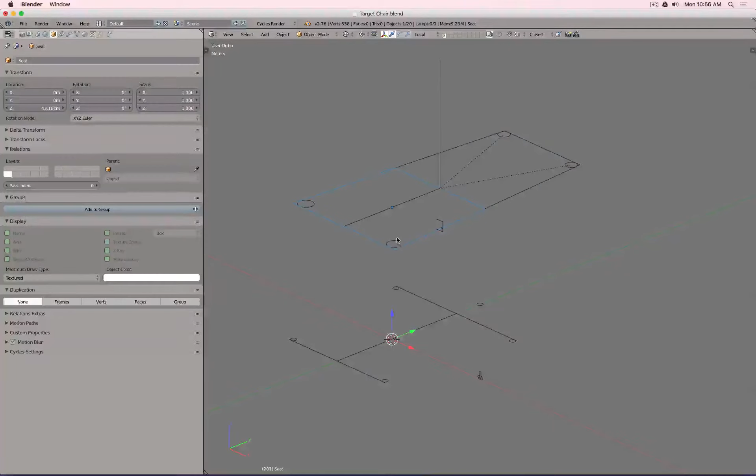Inside the Blender file, I put in already most of the necessary elements. So you can see there is the backrest, the seat, including some preliminary roundings for the corners. Here's our spline, because we will build everything flat and then we will bend it. I have here a spacer for the front and back position of the casters, so I know exactly where the pipes will have to be. There is a small dimension line to define how far these two lines have to be apart from each other, including also a small sketch of, for example, the caster.

And here, for example, I put in an idea for how the joint could look. We will, in this process, still rebuild this part in a basic way so that during rendering or presentation it is functionally self-explaining. Obviously this is a stock part we might pick out of a catalog, so we don't necessarily design it ourselves in case there's something already on the market. But it's always good, in a professional presentation, to put these details in to a certain degree so that they are really self-explaining.

Okay, so maybe we should start with those legs. I have here the position of my casters. So there are two ways now how we could actually start everything. And I will actually put my casters into position first, because then the pipe later has to end at a certain position where the casters will be.

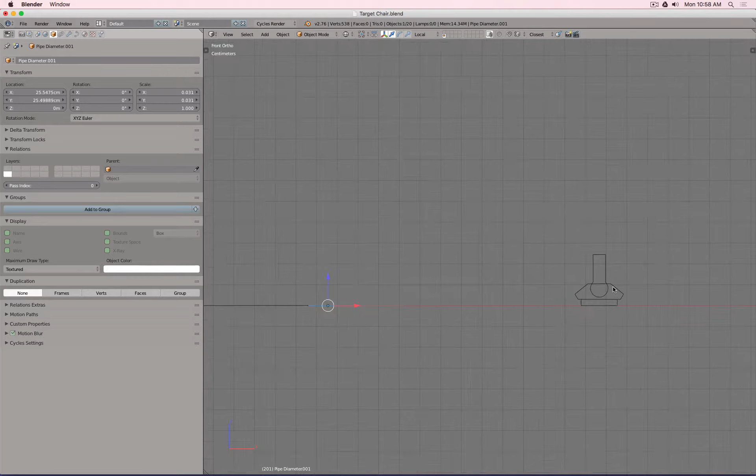So maybe in this case we will continue by making a copy of those elements, because then I can go ahead, subdivide it, delete it, and then I already have the geometry to create a very basic representation of that joint. 64 steps - we can go really high here simply because we will not use the subdivision modifier to make it smoother, so just some higher steps so it renders fine. Because again, we will rebuild this one as accurately as necessary to tell our story, and then we don't have to do anything more because this will be a bought product.

So here we can do the same. These points we subdivide, then this I can remove. Here, for example, this one I can bring in and maybe move up a little bit. Okay, let's say like this, and there, this one will bring back a little bit. And these points we can round with Control B. Oh, there's a scale factor, I think. Yeah, there's a scale factor. So in object mode, let's apply it.

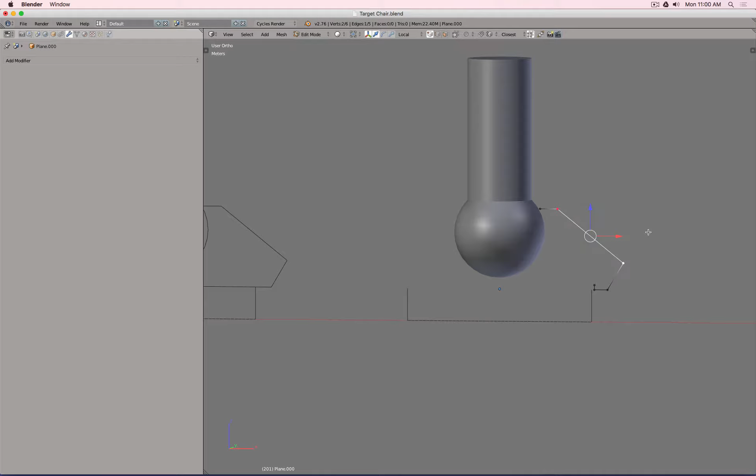Let's do the same here. This one is applied. Okay, so again, Control B. Why doesn't it work? Oh, I'm kind of silly. Shift Control B, not Control B, because Control B rounds an edge and Shift Control B rounds a vertex. Wah, wah, it's early in the morning.

So I can just set something as I want, and then I open my toolbar, go to the bevel command, and let's say maybe 10 steps so it renders nice and smooth. This is actually 1 centimeter. Yep, so I'm in metric, so maybe 0.5 to make it a little bit softer - that's half a centimeter rounding. You also can see the grid. Now this is actually millimeter, not centimeter, sorry, so half a millimeter. I don't know, maybe there we go with 1. It's nice and soft. And then to make this look a little bit smoother, we change the profile a tick.

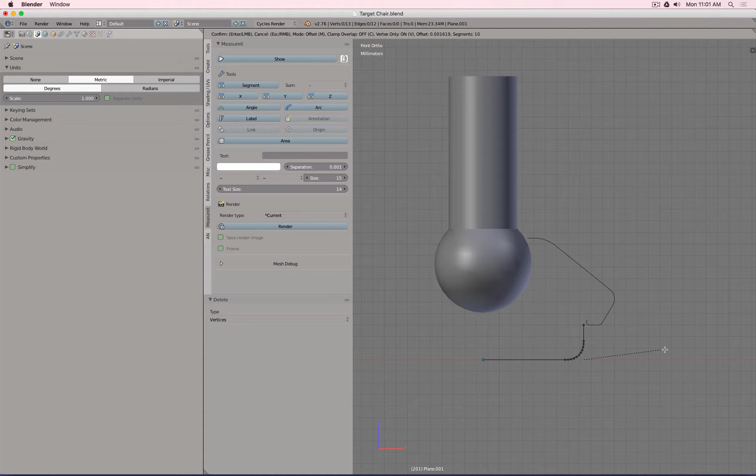Okay, and then these two points, Shift Control B, we just break the edge a little bit. So for this part down here, we can select this edge, add a point via subdivision, and then we can round this one pretty big because that will be the sliding element. We can move this one up, and honestly at that point we can leave it because internal structure we don't see - so in rendering or presentation, what you don't see, simply don't put it in when we're not going to manufacture it, and just render it.

And also here, screw modifier 64 - let's take a look, and that looks pretty good. We can easily see there's a small gap, but the caster is very often this tiny, so as long as the camera doesn't get so close, it's not going to be a problem. If we want to be nice and precise, we can round this corner a little bit, so that's nice and smooth now.

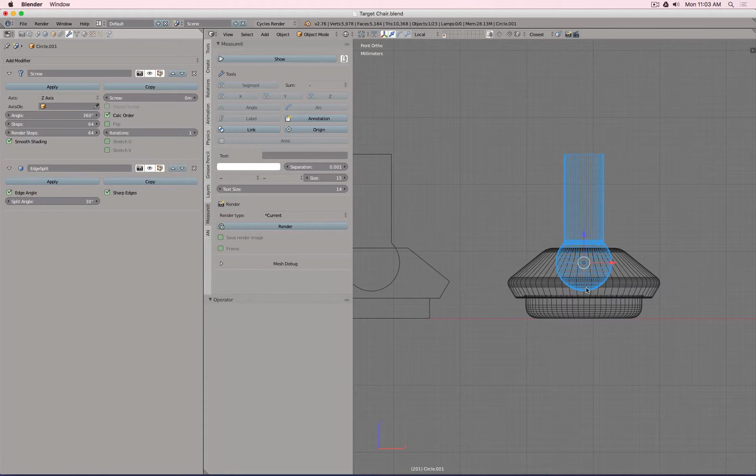Okay, so why did we do this? I will do the following now. So you and you - we actually Control P, parent everything to this part. The main reason is now I can select all this, Alt D, move it to somewhere else, and I do it 4 times. So I have 4 clones, and then I start positioning these objects.

Cursor to that position, and then selection to cursor, cursor to selected, selection to cursor. So you see I'm positioning now all these casters at the correct point.

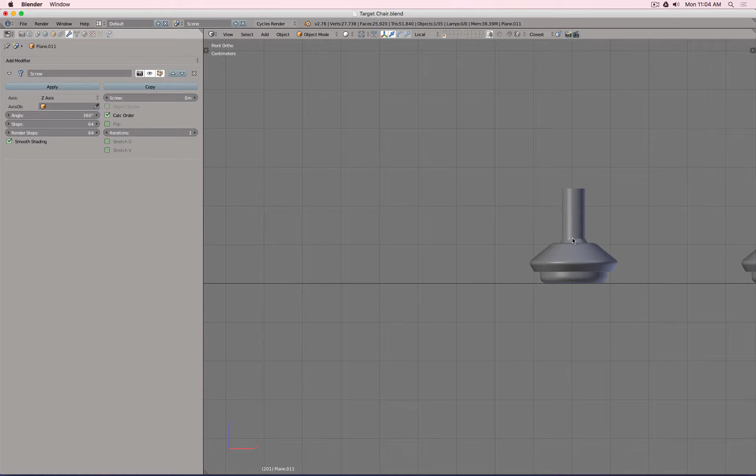And I roughly have now an idea where, for example, the center point of my pipe would be. So let's say this one would go in a little bit, and from here this would go in there a little bit. So maybe where this point is, I will start creating my sketches for my spline.

So let me measure something - I'm curious where this object actually is. This is 8 millimeters. So I will set here everything to 0, and then 8.3 millimeters.

Okay, and just create a plane. This plane for me is just as a reference or a helper to visualize something. Okay, so let me hide this for a moment.

So now I'm ready to create the splines. I could maybe start with the back leg. So cursor to selected, go into top view, and let's add a Bezier spline. I will set everything to vector, this point, cursor, selection to cursor, okay.

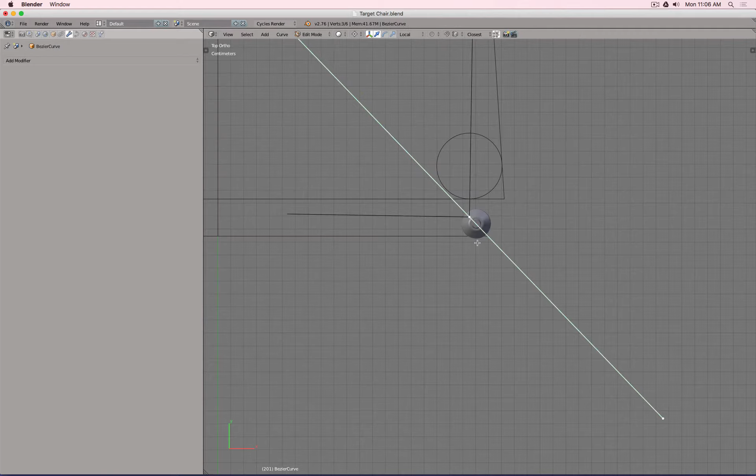Okay, so in object mode I can now rotate this one. And then when I go into edit mode, and I still have local mode turned on, you can see now that I can move this vertex and make my spline longer or shorter.

And for example, it should be roughly there. Then maybe go into object mode and fine tune the rotation. There, and this seems to be pretty close. And we can bring this one back.

Okay, so now you see I created a line from this point to this point. So let's say 3D cursor to the center, because I want to double check if I'm really on it. Oh yeah, I'm pretty close. Perfect. Okay.

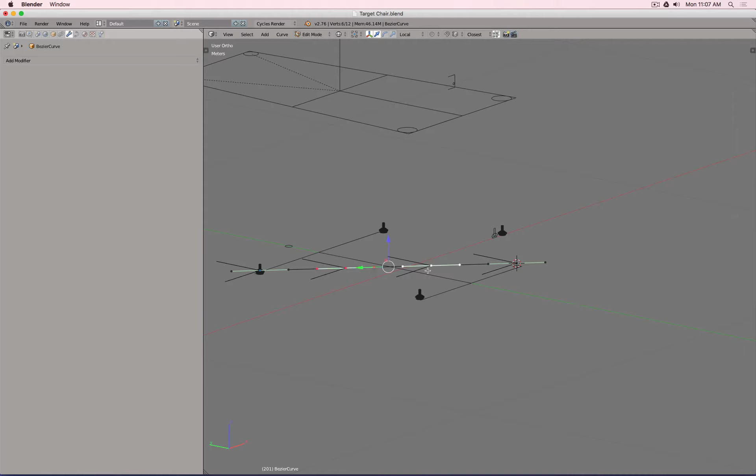So I have to get everything up. I can select the complete spline, W, subdivide, and then either F6 or go to the toolbar, and then we add 2 points. And then these points we can move up, maybe till there, let's say.

And then I have to move these corner points forward. And you see now, because I'm in local mode, I rotated my object 45 degrees - I think this one, yeah, 44. I can now easily make use of local mode and simply slide everything perfectly. I don't have to be concerned about moving it left and right. Okay, good.

So, because Blender can have clones, I can Alt D, make a clone, move it to somewhere else, select this point, Shift S, cursor to selected, and then say selection to cursor, and let's make this one minus. So now it's perfectly mirrored. Okay, you can also see where it intersects. Great, so that's kind of like our basic leg.

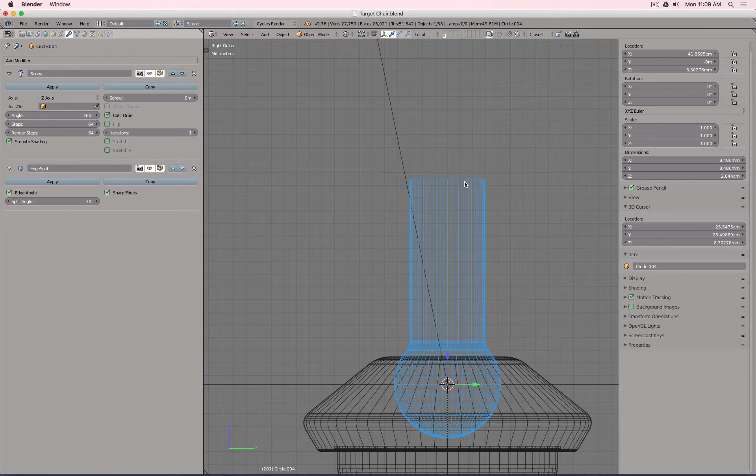And for example, here we can select this one and maybe in this view rotate it. Actually, we can select maybe both here, there, and rotate it at the same time. Maybe zoom in a little bit, there. And then here we have to do each individually.

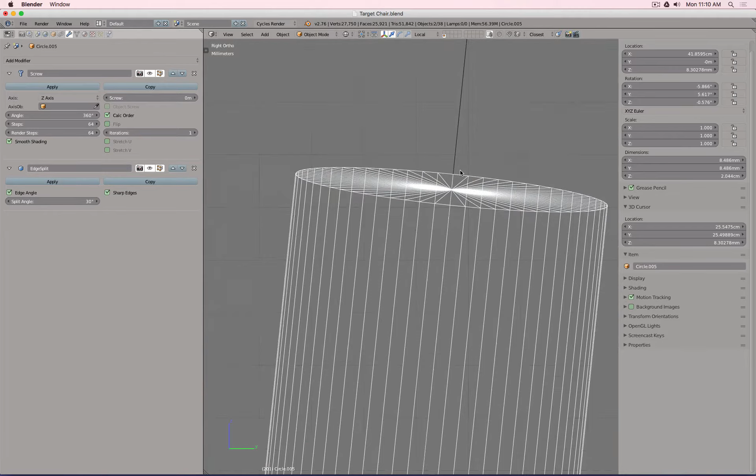And there. I think this was 8. So also here can rotate this one, do the same there, and then go to side view, select both as you can see, and then rotate it. There, perfect. Okay, so as you can see now, I also have created, rotated all those joints or threading parts, so they're kind of like parallel to the pipe.

Don't really have any piping yet, so let's do this in the next step. This object, I will Shift D, make a copy, because I don't have rounded edges here yet. I can't select a point and say Shift B to bevel it, because it doesn't work. So we have to do something different, and we'll use some interesting tricks here.

So this top edge, so these 2 points I select, subdivide it 1 time, but I want it twice, because now I can move this and this, and then scale them apart from each other with S, or YY, it's the same. And then we can also select this and this, this and this, subdivide it, and I want these points to be at the same height, so I will use a very crude trick. As you can see, I subdivided then these new segments 1 more time, so I get these points higher.

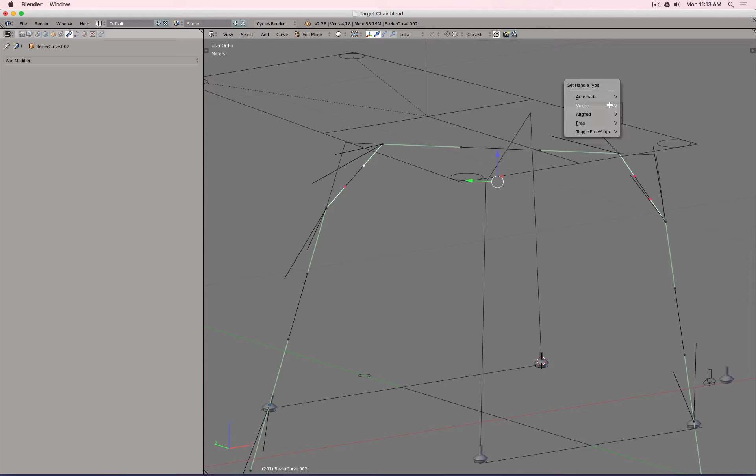So what was this useful for? Well, the thing is, I can delete now these corner points, and then these handles I can set to aligned, and I have, as you can see, rounded edges. So as it looks like, I can subdivide this 1 more time and then get rid of this. Now this is a really crude way to do it, but again, for a quick visualization, if you don't have a fillet tool or so, this is actually pretty useful.

So now I will go to normal and, for example, push this point up. Same here. There, maybe I will push this out a little bit, and there. And let's take a look how the rounding looks. Okay, yeah, maybe this is a little bit too tight, so I soften this a little bit. There. Okay. So again, because in Blender we don't have a fillet tool for curves, but because we work with a spline tool, we have it kind of like built in. We just sculpt it. Okay.

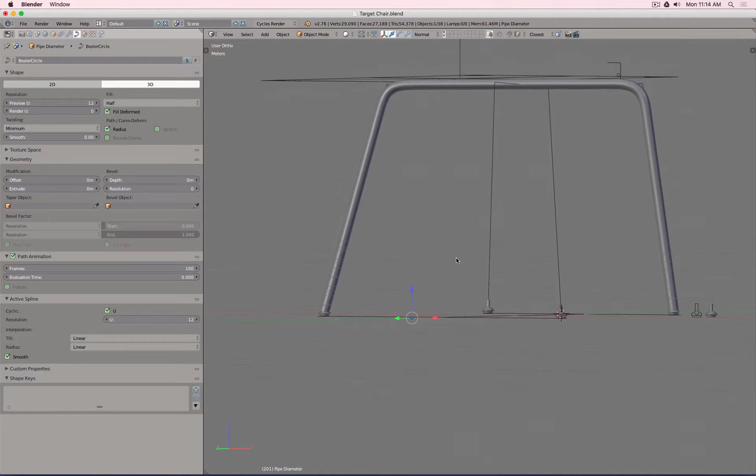So this, maybe we can move to the first layer, because now we can add actually the pipe cross section, which I have back here. And then we can take a look at how this feels. Let's take a look at down there.

Okay. So this pipe, maybe we want to duplicate, so Alt D. This is currently on the negative side of X, so we set this one to positive 25, and then this Z rotation we set negative, and there we have it, perfectly mirrored. Okay.

I quickly want to select these parts here and hide it, and then also hide this. Nope, this spline, because I want to bring my casters over to the first layer. You, and you. Move to layer 1. Okay. There. So now we can zoom in and take a look if there are some issues, and there are.

As you can see, the pipe intersects there. Not really ideal. But this is not going to be an issue because we also have a spline start and end command. So we can actually move this a little bit backwards. So this is maybe a tick too much. 0.0005. Ah, this is better.

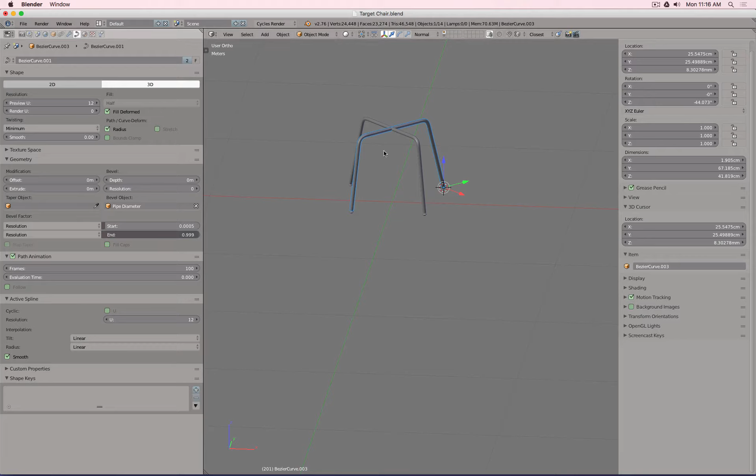So let's double check how this all looks. Okay, this looks like a little bit too big. Maybe rather there, okay. And then here we can do this one more time. You see, because we work with a clone, they update all at the same time. Pretty nice. Yeah, maybe like this. Okay. Good.

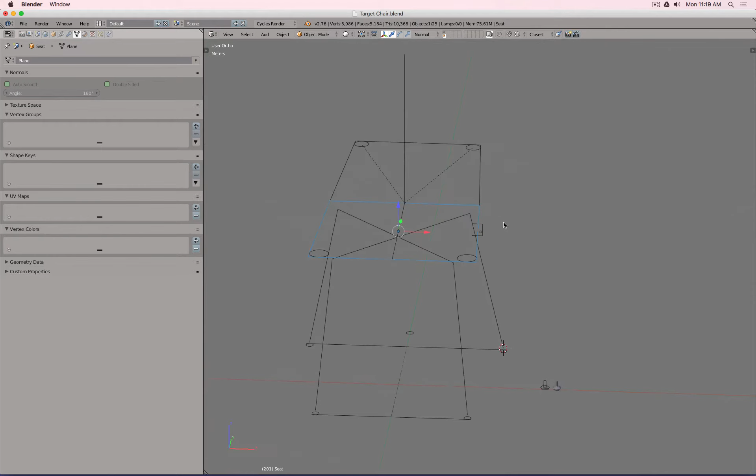So, I would say for the beginning, this part is pretty close, and maybe we can keep it at this for the moment. So at this point now it makes sense to start actually with the harder wood part. So I have these two elements here. So the seat and the backrest. I will make myself two copies. Shift D, I'll move it to the second layer, and then actually I will join everything.

Actually these edges I will remove. These points I will merge by remove doubles. Okay, and then actually for the moment I will say dissolve vertices A and F, so I have a flat shell. So why did I do this? When I go to here, we can see that there is a little bit of side material. So my wood part gets actually pretty close to the left and right side. So let's say this is roughly 5mm material.

So I might have to shrink this wood part a little bit now. With this face selected, I could press the I key to do a face insert, then T to go to my insert face command settings - even offset, yes. I'd like this to be 0.5cm. So you see this is now centimeters - this is 5. Did I say 0.5 centimeter? Yeah, that's 5mm. So now we're in millimeter view.

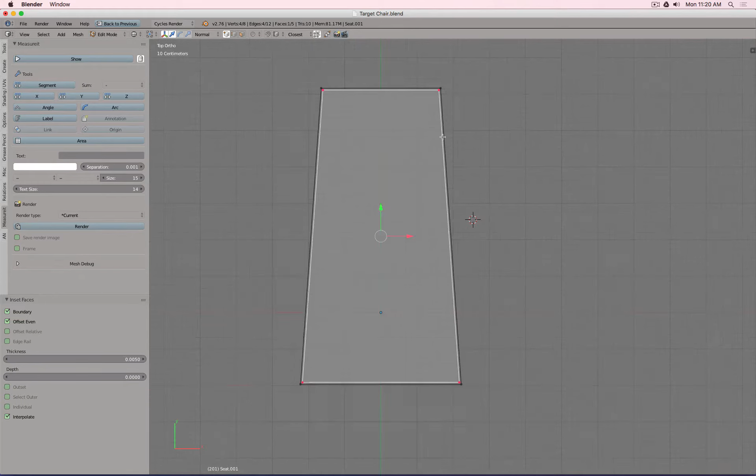So each square is a millimeter. 1, 2, 3, 4, 5 - yeah, so this is 5. Okay good. So I can press P to separate.

For example, this part I can isolate, and this one maybe I move onto this layer. So this is now my plane for the wood part. I can add a loop cut, for example a center loop cut, and then I'll prep everything to use a mirror modifier so I have less work to do, and then maybe add a subdivision modifier to round the edges.

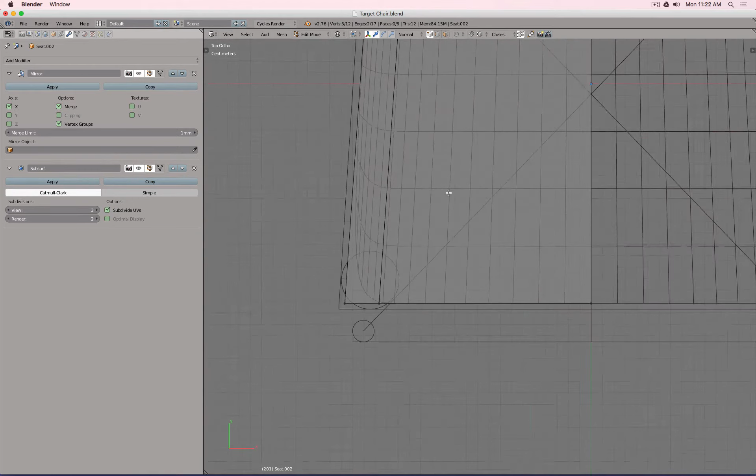Because now we'll turn on the wireframe display here, I can go ahead and add a loop cut. I completely move it to the left side, then G and X to move it a little bit to the back, and then a loop cut here, there, and a loop cut down there. Maybe something like this.

Okay, maybe this point I can move in a little bit so you see it rounds this corner a tick more. Maybe the same there. And I can add another loop cut there, one additional loop cut there, and bring it closer - not too close - just to straighten these sides a little bit.

There, okay let's take a look. That seems pretty good. Okay, so let's assume - unfortunately I can't measure it, but I assume there will be maybe a centimeter, let's say 5 millimeters of wood core inside. We'll do an even thickness, high quality, offset to the top, so it actually grows away from the pipes, so it's not intersecting with them.

Okay, and we might now need to build our spline. So I make a copy of the spline, M and 2 to move it to the second layer. And yeah, so how do we do this? We can actually do the same trick with the fillet by subdividing this.

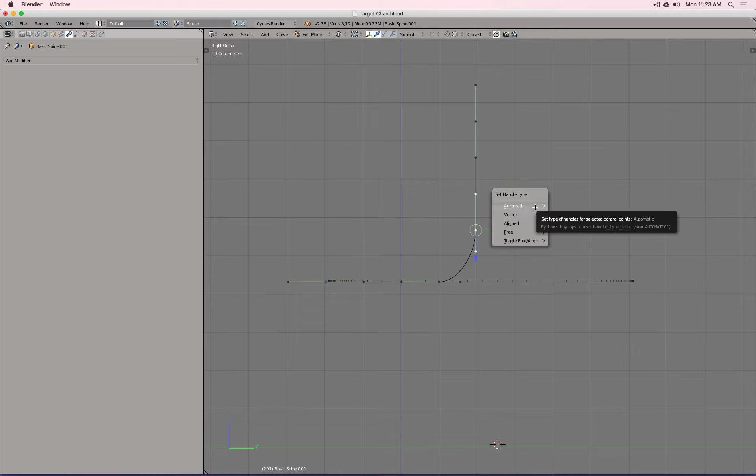This one I can move down, this I can maybe move closer, this one I can remove, select these two, aligned - this actually may be automatic, or aligned. Yeah, so there, okay perfect. And then this one - whoops, wrong key.

Rotate a little bit there, so we get a little bit of a curvature. Maybe a little bit closer.

Okay good, so with this spline done, we can add the curve modifier to this wooden base. You see actually that my object has its local orientation X, so this spline is actually rotated along the Z-axis. So initially I created the spline and then rotated the whole object, so it matches the growth of my wood plank, so that the spline X-axis is the direction of my wood plank. Okay, so use this to grow along. Perfect.

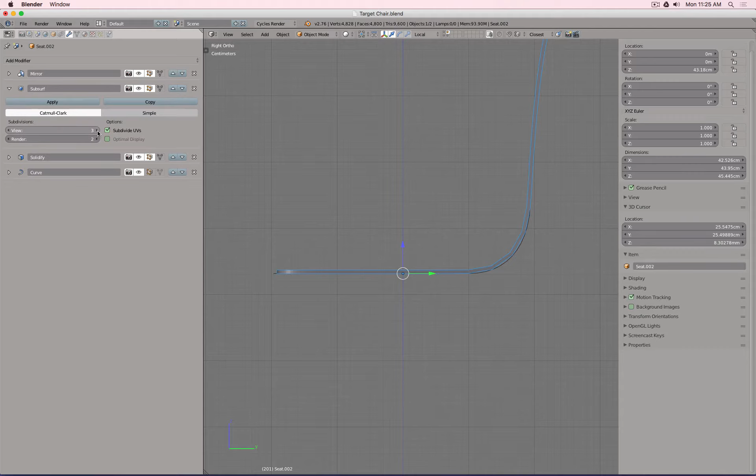And let's take a look from the side how this feels. Yeah, this is actually not too bad. I'm not sure about the curve - we'll maybe be able to fine tune this later even more. At the moment I don't know if the curve is too big or too small, because we also have to include the upholstered foam that goes over it. So this might mean that internally the curve is a little bit bigger, but to your hips, then obviously because the circle shrinks, it will get smaller.

Okay good, so let's maybe clean this up a little bit. Let's name this - let's call this wood core. Okay, I think this is pretty good. Let's see if we maybe should put this one on top or below - it doesn't really matter. Okay, and that's pretty much kind of like what we have to do for the core.

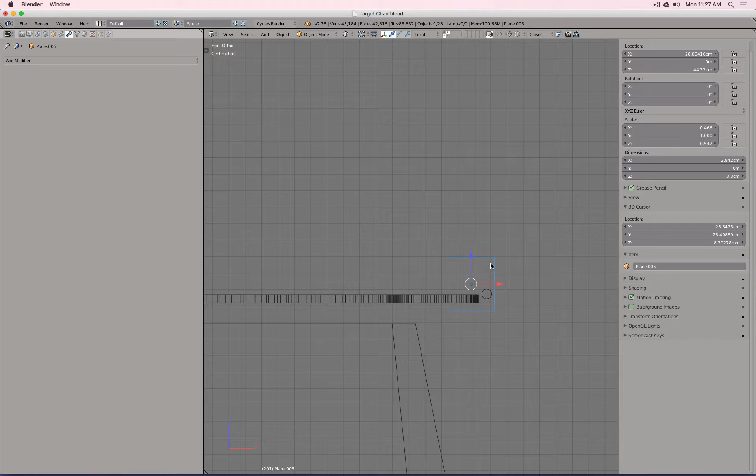Now it's time to do the upholstered part. The nice thing about this process using the modifiers and having everything flat is we can also build our upholstered part pretty flat and then just make everything a little bit bigger. So I will do the following: I'll make myself a copy of this part, and then let's go here - here we have an object that is 3.3 centimeters tall. That roughly describes the thickness vertically. So this wooden core that I made a copy of, we can call this one now maybe foam.

We only have to adjust this one now to 3.3 centimeters. And then, because it grows directly from where the wood plate starts, we have to change the offset so it goes down a little bit till there. Perfect, I will move this one to layer 3. Let's take a look.

So there you see, for example, now how this rounded corner gets bigger, smaller. See, this is pretty big, and here it gets pretty tiny. Okay, so this maybe should describe roughly the basic foam. But this looks pretty blocky, not very good.

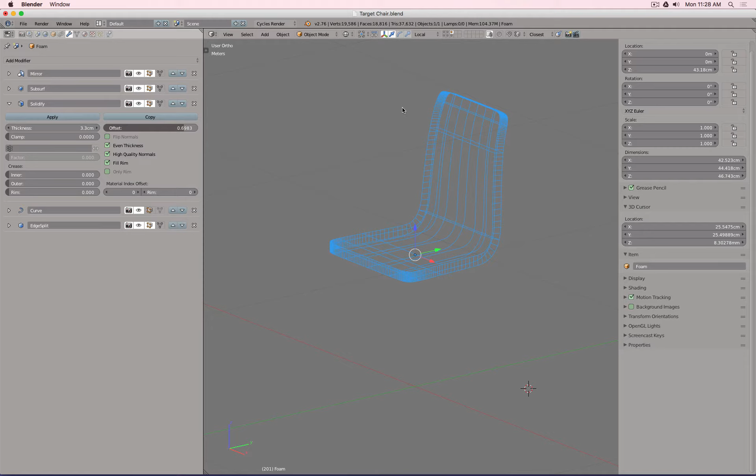So now we have to sculpt this stuff a little bit more. Shift D, make a backup copy, I move this onto a different layer. And then we can see now what are possible options to do this. So first, I will undo this and then maybe show this, because this object also

doesn't have the correct size. It is as big and wide as the wood, but it has to be 5 millimeters bigger. So what is now an easy way to fix this? Thankfully, we have our original geometry there. So what I can do as a quick workaround, I will simply move this one up till it hits kind of like this 5 millimeter mark. And keep in mind, we work here with foam stuff and compressible materials, so we can get away with eyeballing something here now.

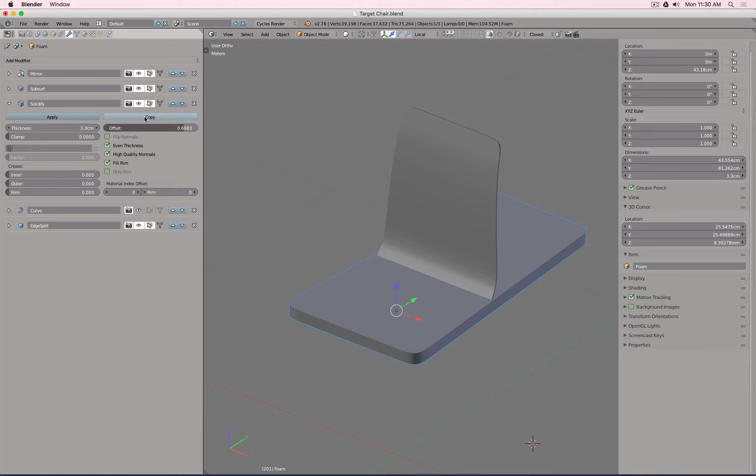And there, okay, so this is now just a tiny tick bigger than, for example, our wooden core. And you see, it is now perfectly inside and enclosed. Okay, great. This actually should have been the copy to move to there. So here we just delete that smaller, older one.

Next step now, we have to round all these top edges to a certain degree, so we get this look like we have here, where this top edge is nicely rounded. And you see this is more a flat surface. So think about this kind of like a filleted sharp edge. And here this is sharp. So let's see maybe what possible tricks we have here to achieve this.

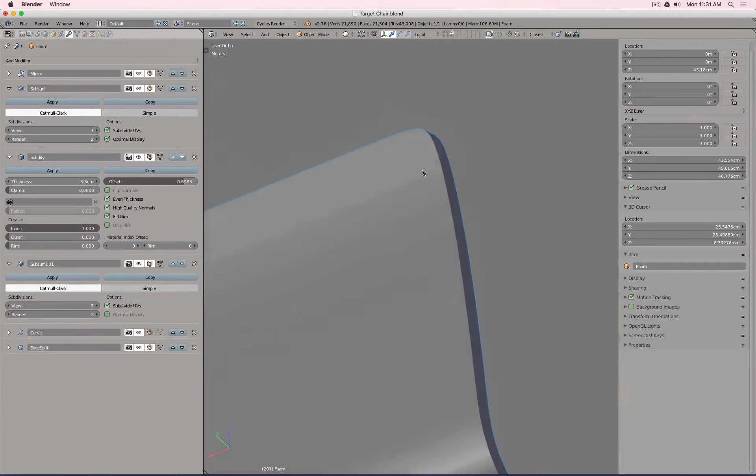If we set this to 2 and then we add something afterwards, set this to 0 and 0 there, and maybe this outer one - nope, that's the wrong one, maybe there. See, we can sharpen this a little bit, round this a little bit, and then bend this. So now we did a pretty quick study to see with the sharp edge in the back and the rounded edge in the front, but that doesn't really look very good. So we don't get around having to build the actual three-dimensional volume for this.

So the solidify modifier I will apply, but first I will apply the mirror modifier and then the solidify modifier, and there we see now we have a nice and soft object again. So there we are, let's take a quick peek and compare with our wooden part to see if it sticks in somewhere. It does. Later, actually, this front part also dips down.

I'm actually curious how this would work out. I know we could do it. Yeah, we can do it that way later. Okay, good.

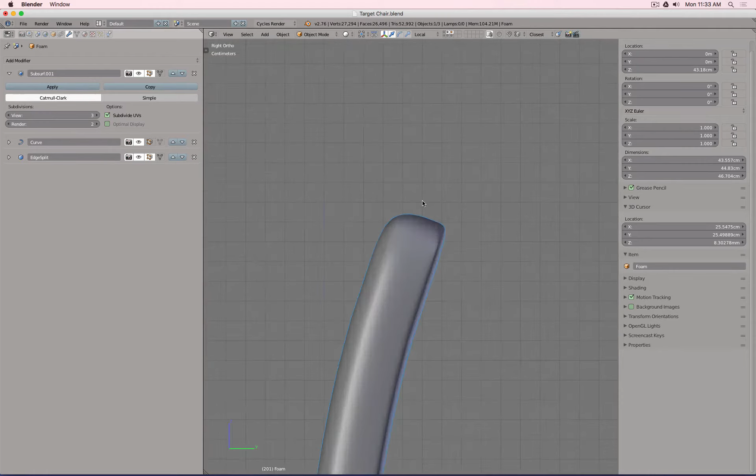So we have to add a little bit of geometry at the bottom because this is too round now. So going to edit mode, loop cut, and maybe bring one loop cut down to, let's say, maybe there. And you see now that this lower area is being straightened and then the top remains nice and round. Okay, good.

But this is, I feel like, a little bit too flat, so we have to adjust this geometry here. So in this case now, to make work again a little bit easier, we can simply delete this half and then add a mirror modifier and move it on top of our stack. So we have this other half again. Okay.

Now these, not this one, these points I can all select. And what I'm looking for right now is this point. They all have to maybe, including this one, or not - let's see, no, not this one. So those we move a little bit to there, okay. And then this, GG, and we just simply move it along there.

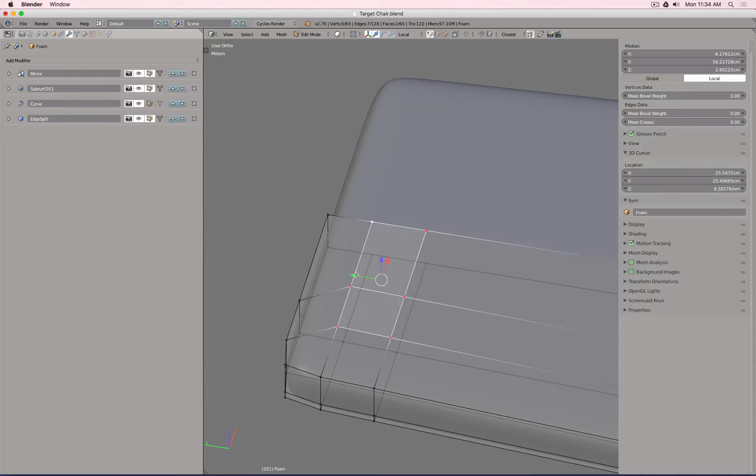And I'm curious if this maybe helped a little bit. Yes. Okay, so then also there, move this one down a little bit. And down a little bit. Let's take a look there. Undo and show - can't really see much from there. Okay, yeah.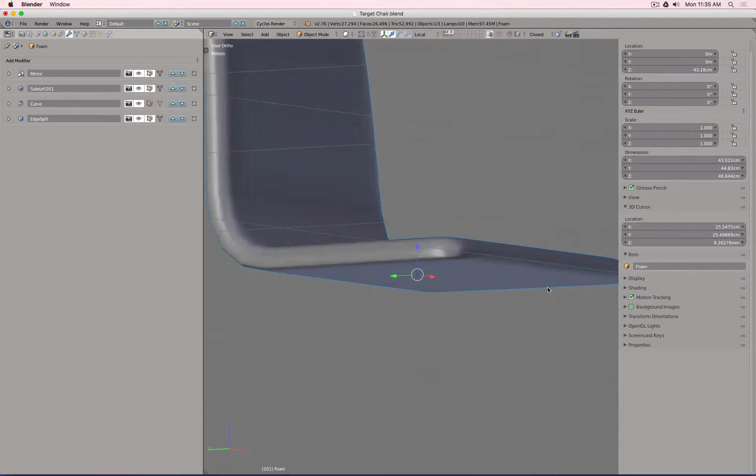Maybe GG, move this even further. Yeah, this is getting a tick better. Maybe actually even here, GG, I will move these points further away from this corner point so that I flatten kind of like that corner a little bit. So let's take a look, undo and show. Yeah, there you see that it gets rounder. Okay, and that seems to kind of do the job. Okay.

Let's take a look. Okay, I would say we run into some smoothing issues here, I just noticed. So what happens if we... no, this doesn't work. So we have some problems here.

So what we will do is I will add a loop cut there, a loop cut there, and then an additional loop cut at the beginning before the bend command. So you see I added some extra geometry for this rounding, then I subdivided my mesh one time, then I bend it, and here you can see the result, and then I can smooth it out one more time.

But it's not perfect, so maybe one more loop cut there. Yeah, now it is flatter again. Okay, good.

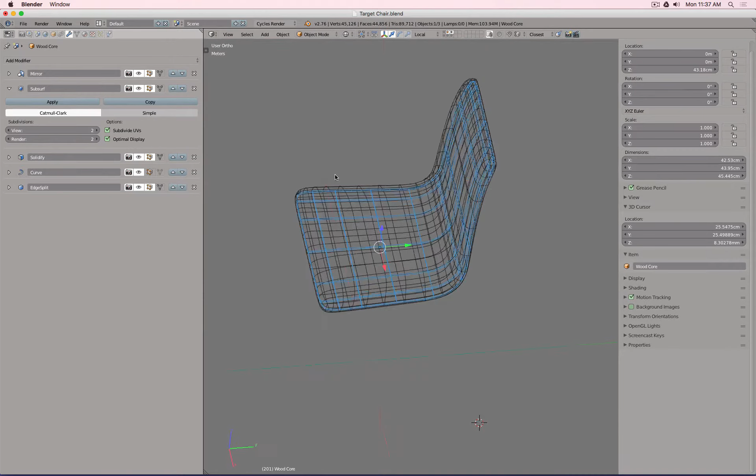So that means I should probably do the same here. So one loop cut there, one there, an additional one. Let's see if this fits well. Okay.

Yeah, okay. And that flows pretty much the same. Good.

I hope this made sense, because the curve modifier will bend something, and as much geometry you can add to a mesh before we do the bend, the smoother the result. So if, for example, we turn off this, you can see that's all the geometry we have, and when we want to bend it, it will simply look like this. By the way, this is also a very good preview if you want to see where maybe for a bend you have to insert extra geometry.

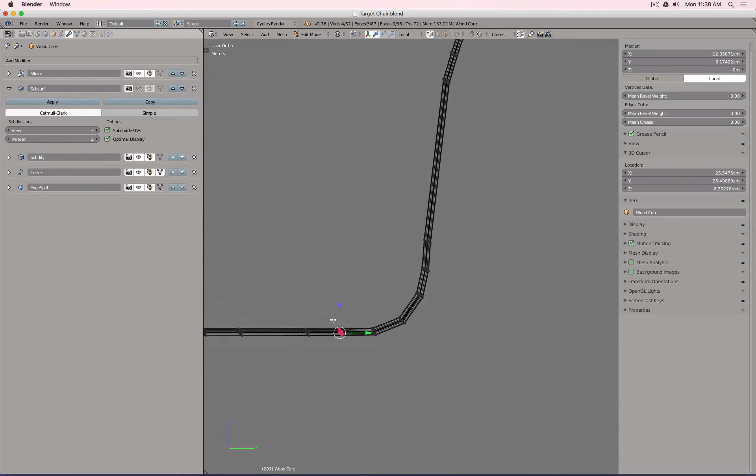So that's what I'm doing here right now. I only have geometry at needed positions, because then I can actually get away with less subdivisions and still get a really nice and soft rounding.

This curve I want to set to 32 so it's smoother, so my bending will actually be better. And then maybe here we do the same evaluation.

Let's turn on the bend as a preview so I can see this needs a loop cut, and there maybe, and there maybe, and there maybe one there. See, I'm already pretty close, so then also here I don't need as many subdivision levels.

So, and this one I have in the back, I could even completely remove. Yeah, so now you see this works much better. Great.

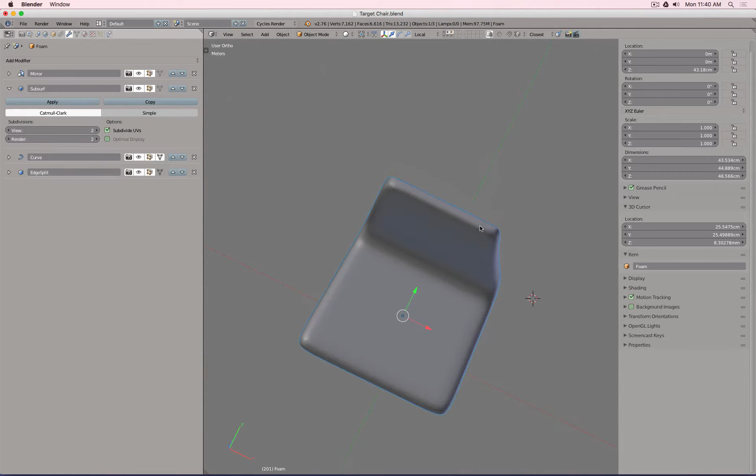Okay, so I would say our basic shell for the upholstered foam, maybe we could call good. I'm just curious if we select this one and move this up a little bit.

I would like to round it a tick more, because I'm still bothered how flat this part looks. So if we take this out, but then this is too round. Okay. Plus we will have this tunnel object that flows around it there as well.

Okay, let's leave it. So it's time now that we can build this seam here we have. This is roughly a 5 by 5 millimeter cross section, looks like a tubular part. So let's go back to Blender, and I'll show you a pretty nifty trick how we can do this.

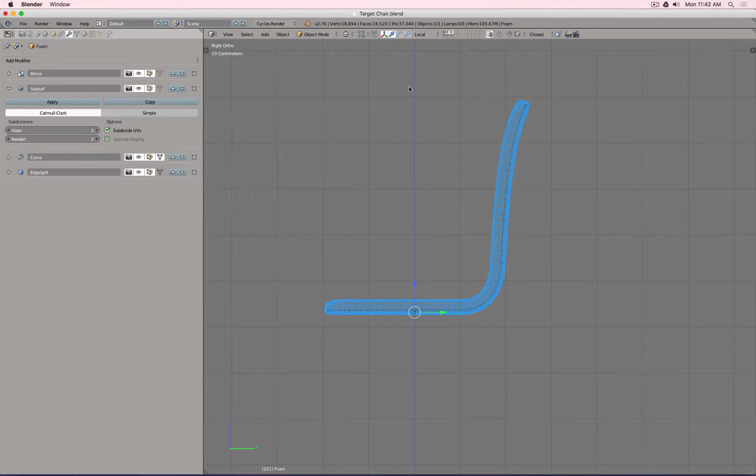So I will select this loop I have here, then I will press Shift D and escape. So we made a copy and moved it out, and press P to separate it. So there is this curve. Okay.

Now the nice thing is, you see, this is still part of the original mesh, so it's actually flat. And if I select it and move these points up and down, you see it will also be bent and then slide around my object. But the problem is, if I move it to there, you see I will get a gap. Not ideal. So how could I make sure that this one snaps onto the mesh?

So in this case here, we can use the shrink wrap, and also in this case with the nearest surface point option. Target is our foam. Okay, let's take a look. I see it fits. So let's go into edit mode, move this one up. Let's zoom in and you see, dang, it snaps to it. Perfect.

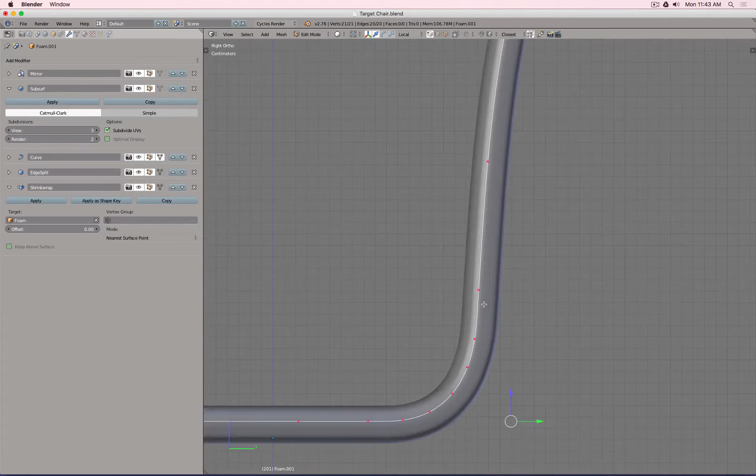So we don't have to mess with the geometry and add something there. We simply can create this loop where we perfectly need it. Let's say somewhere there. Okay, good.

So now how do we pipe this? Well, Blender for mesh modeling doesn't really have a pipe tool. That's good. We have something similar, and this actually comes from character modeling, and it creates a square cross section.

So what we do is with this mesh object selected, we will add the skin modifier, and then we will get something that looks like this. And then we can go into edit mode, AA, and then what was it? Control A? Yes, Control A, and we can change the diameter a little bit more and more and more.

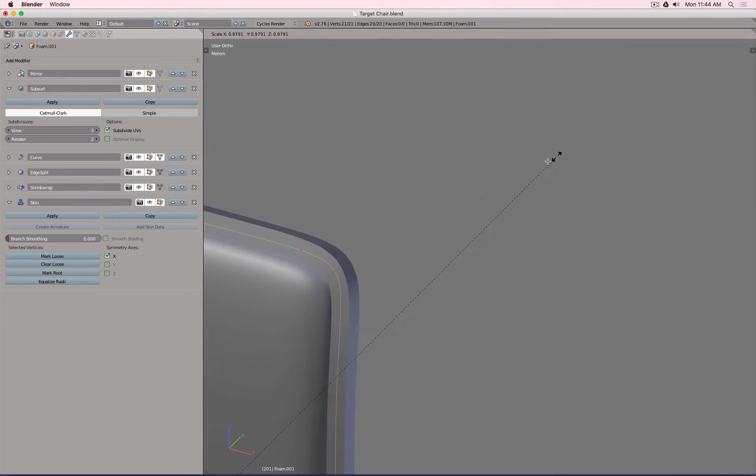So how much do we need? Here in this case, our small cross-section helper will do wonders, understanding how much it has to scale down. So this looks roughly like what we need.

Okay, let's take a look at what we have. So you see it's a nice band actually, but the problem is this band is rectangular. Okay, not a big deal.

We simply soften it. Let's first turn smooth shading on, and then we say subdivide, and there it is. Now it is not perfectly round, so maybe one more, and there.

We have a nice seam now. Again, if we go into edit mode and move all the mesh up, you see the shrink wrap modifier will snap it back onto the mesh, and then the skin modifier will create that matching geometry for us. Or we can move it down maybe to there.

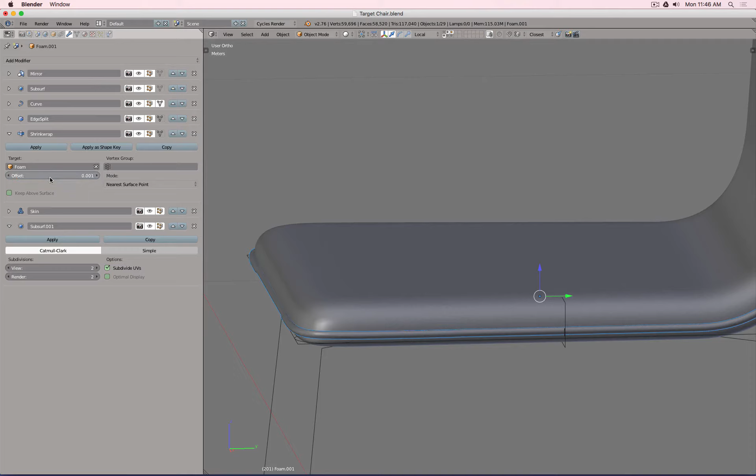Let's see if we can actually move this out a little bit. Essentially this is a bit of fabric and we stitch it down together here. So we have something in between, which gives us this roundish look. We will have to move this out a little bit more.

Because we work here with upholstery, we can simply simulate how a structure should look like. I feel this is pretty believable. From a distance, you will see there is a seam around, and again, this is fabric. The pattern department will take this conceptual idea and make a physical prototype, then do all the manual pattern making by hand and get the dimensions correct. So in this case, what we have here is really sufficient.

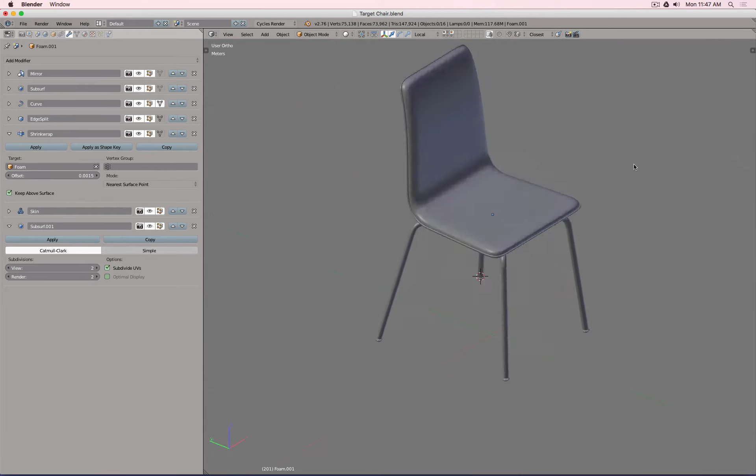So let's take a look. There we now have the pipe, the casters, the foam, including a wooden part which we don't see right now, and then this seam element around it.

In the next step we have to do the stitching, and this is actually a really tricky part because we have this threading plus the holes and then the seam here. This is really difficult to do with a low density polygon model, because when we add extra geometry for the seam, our shell will deform and pinch there. And also we see all these small holes where the needle went through.

This is also very difficult to do right, but we can actually simulate the position of the threading and the way it looks and where it is. Then I will show in sculpt mode how we can create the seam and maybe the dots even.

Okay, so let's go back. So somewhere here should be this seam. Let's work on the stitching first. Let's say I would like to work with this part here. So Shift D, Escape, P to separate.

Let's go back, and this stuff here, let's delete. Okay, good. And this also sits on it right now.

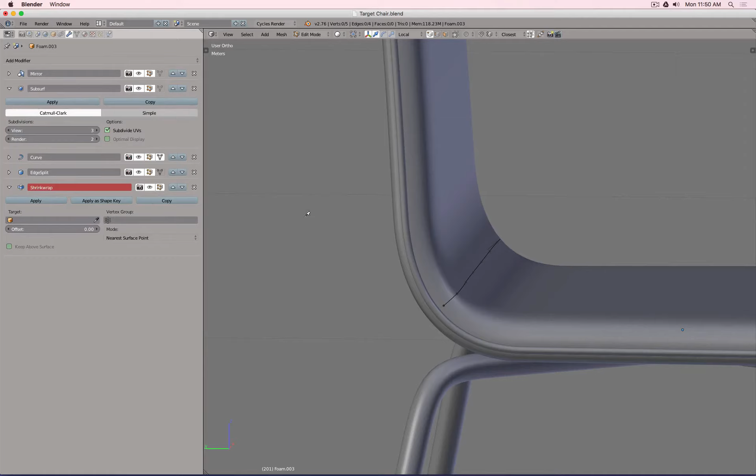So also there we will add a shrink wrap modifier to this foam part. The main reason is now I can select this and I should be able to move it left and right, and then it goes up and down. This is pretty fantastic actually.

I would like to clean this up a little bit first, because as you can see from the side this has some issues. So here S and Y and 0, and there it is cleaned up. I will turn off the bend for the moment. So yep, this is nice and flat now.

Okay, good. If I Shift D and make a copy, I can slide one copy down, and there I have the other part.

So this is maybe now where I might have my stitching. I will need to have some extra points added. So let's delete this one, U, E, escape, and maybe I move it down the Z point a little bit. So that I have a little point there, and maybe here, this point, I move up a little bit.

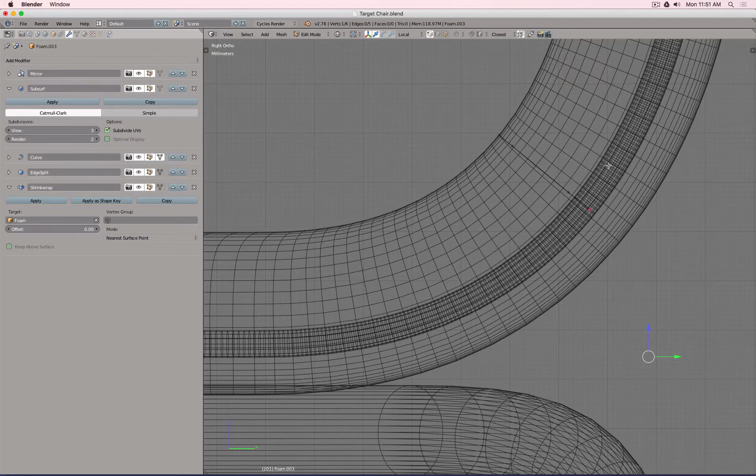Okay, I'm trying to shoot for that this last point ends actually behind this pipe element, so I don't see it. Okay, good, that's nice. So how do I proceed?

Well, what we will do is we will build ourselves a small stitching array element, and then we bend it along a curve. So this, for example, what I have can be used to simulate maybe where my stitching should be. But because this is a polygon line, I can't really use it for the bend command. But I can actually take this and convert it into a spline.

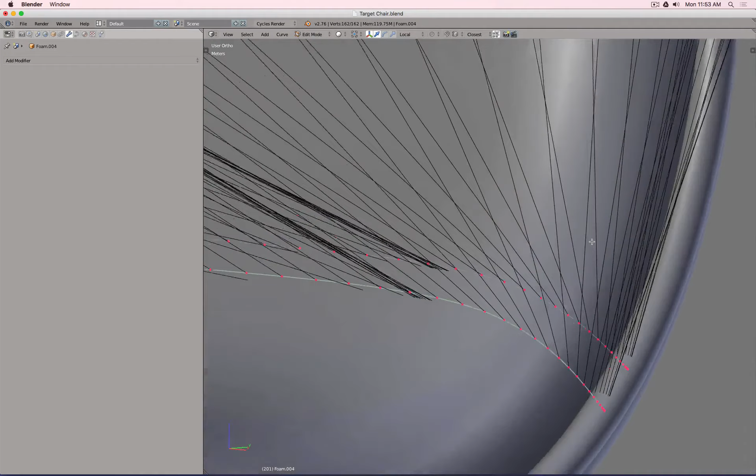So that's what I will do now. Shift D, escape, and then let's see where the command maybe here is here. Convert to mesh, no, curve from mesh object, do it. And then when we go into edit mode, you see now there we have a very dense curve. And thanks to the subdivision modifier, it adds all these nice points, so it's nice and smooth.

Also here, we can actually shrink wrap if needed to the foam part there, so it perfectly fits. I will move this one onto layer 4 and these polygon lines to this layer, so it's out of my view for the moment. Let's take a look at what we have.

Okay, so first let's turn off the normals. Cursor to selected, L and P, and then Shift, Control, Alt, cursor. So I set my pivot point there as well, cursor to selected, Shift, Control, Alt, C, and cursor. Cursor to selected, and then we have to build our stitching.

Let's make a big cube. This cube, let's say, should be 5 millimeters by a millimeter and a millimeter, so a little bit thicker stitching. Ctrl A to apply the scale factor. Let's go to the array command, maybe 50, 1.2, 1.3.

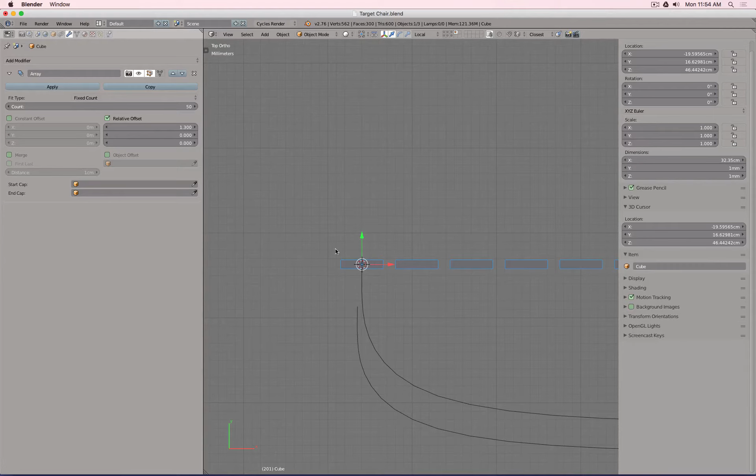Think about the holes here. Okay, so now we have this really long line, and we will bend this over this curve.

There, and we have already a very basic stitching. Obviously this looks pretty crappy because this is just a block, so we have to sculpt our stitching a little bit more. We can go into edit mode, add 2 loop cuts, and then maybe move these ends down a little bit. This is all nice, but now the stitching is not rotated correctly.

So I will not do this in my stitching object. I will simply select my spline, AA, press Ctrl T to tilt my spline, so I kind of rotate it on its own axis, and then you see by doing this I rotated the stitching elements.

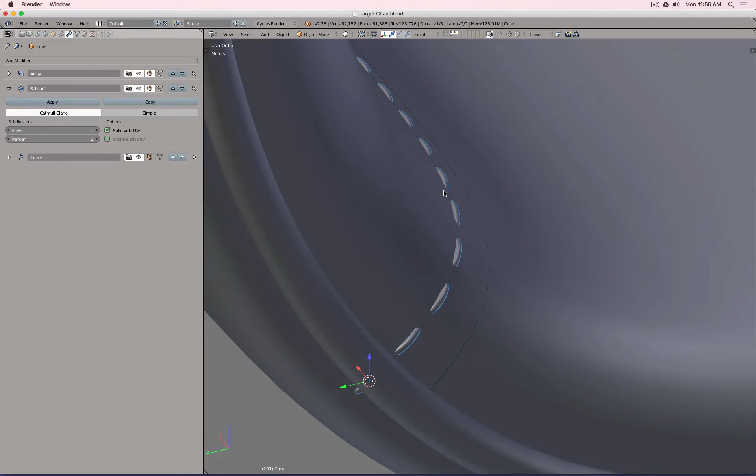Perfect. Now they still look pretty blocky, so we can select this element and say subdivide maybe twice. Doesn't need to be too much, this is just a small detail. Maybe we have to increase the number correctly, maybe 65. Carefully, we don't want to add too many. Oh, 65 was actually a good guess. Yeah, and there we have it.

So let's do this one more time. Alt D, I will make myself a copy. Cursor to selected, selection to cursor, override the curve, and use this one. Then also here I have to select the curve, AA, Control T, and rotate my mouse there. Maybe let's call this one seam path 2, so it makes sense with seam path 1. This is actually stitching 1 and stitching 2.

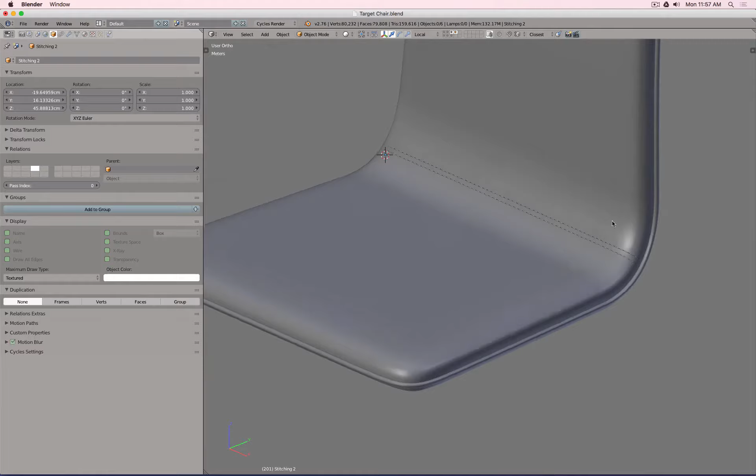That's also the reason why I do not like doing seams and all these things in Photoshop or Illustrator, because they're flat. If I have a 3D model, it doesn't take much to build a perfect seam, and then I simply render it out. Because these objects are three-dimensional, I can also shade them correctly, give them a nice material, etc. And yeah, it just will look better, more realistic.

Okay, maybe let's hide these lines, zoom out a little bit, and take a look at what we have. Let's compare this with our object. So obviously the stitches in this reference here are much smaller. The thing is, the threading nearly fades away.

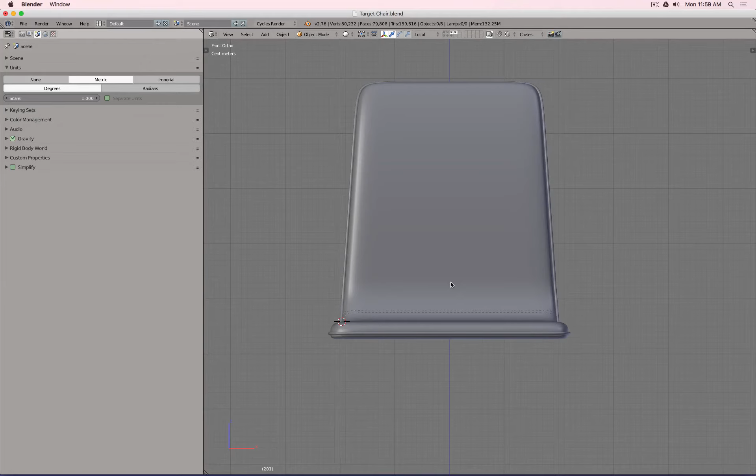You really have to zoom in, so that's difficult to do with CG. We have to kind of make it a little bit bigger so you can see it. We can actually make it tinier too, but what we cannot do is create all the fabric deformations caused by the stitching. So this is kind of a small limitation to it. Actually, we could sculpt it in, but that's a lot of work, and maybe not necessarily that important of a detail to do.

Only when we really go in, maybe that area we can sculpt better. But for product rendering, most times you will see it from further away, so it will be fine. Plus the stitching shouldn't really jump into your eye, it should be more in the background.

So here's an alternative way how we can create those paths. I will set my 3D cursor where my mesh is and then add a Bezier. I can go into top view, scale this one all down. I will turn off the normals there, maybe move this one a little bit to the back.

Okay, and then for the moment, so it will be easier, I simply will turn off the bend command, because now I can scale this one down a little bit more. With everything selected, subdivide 3 times. Actually, hold on, before I do this, A, V, and vector, so all these handles are the same, because now when I subdivide it, it's nicely and linearly subdivided.

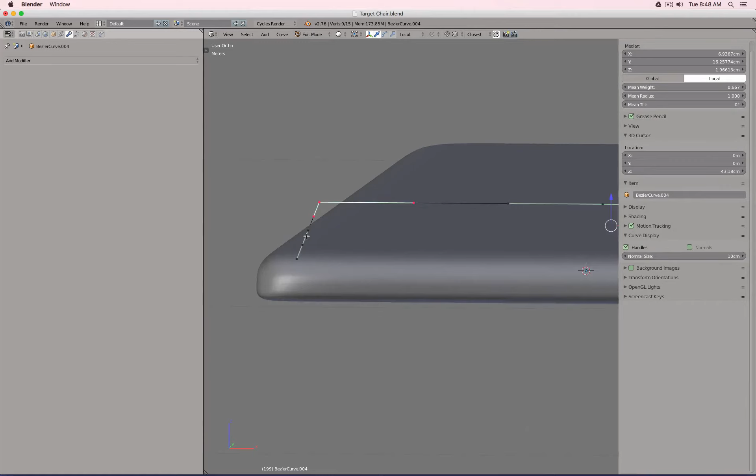Then I can move this one up a little bit. This, for example, I move out. And then this, and this. For example, I can set to aligned.

And we move this one down and snap. This one and this one I will scale along X, so we can put these handles vertical. Okay, good. So you see I just rebuild kind of like quickly a curve that fits, just with a little bit less crazy points.

There, we move this out a little bit. Okay. So this curve I can also shrink wrap onto this part, and you see it fits pretty good.

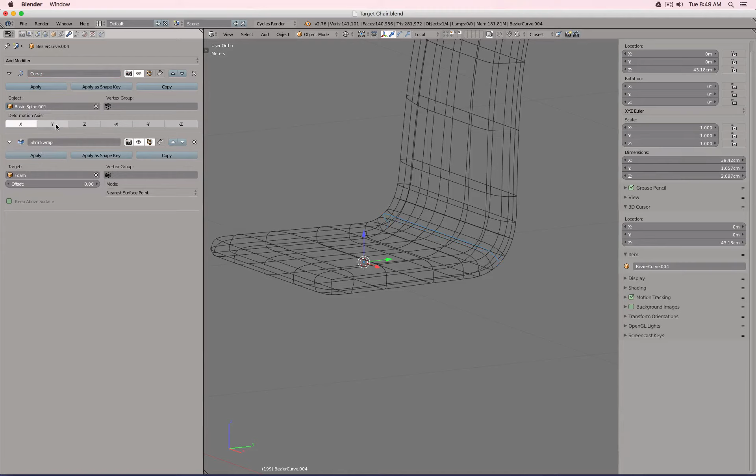This one is basic spline 1, so let's turn the deformation on, and my curve is garbage. Well, because it's not in the right place. I can actually also here in the beginning bend it as well. That's the reason why I created this object at the same position where my foam model is, and you see that based on how I bend actually on my foam, this spline will always follow it.

So there and there. Oh, it's this one. Let's go away. Do I have an extra object there? Looks so. Okay. There and there. Okay, so you see this fits actually really well.

So if I go into this spline and I will Shift D, make a copy, go into edit mode, select my splines and move them along the y-axis, and you see they will slide along my foam object. So not too complicated. That's kind of prep step 1. I will move those onto different layers so I can work with them better.

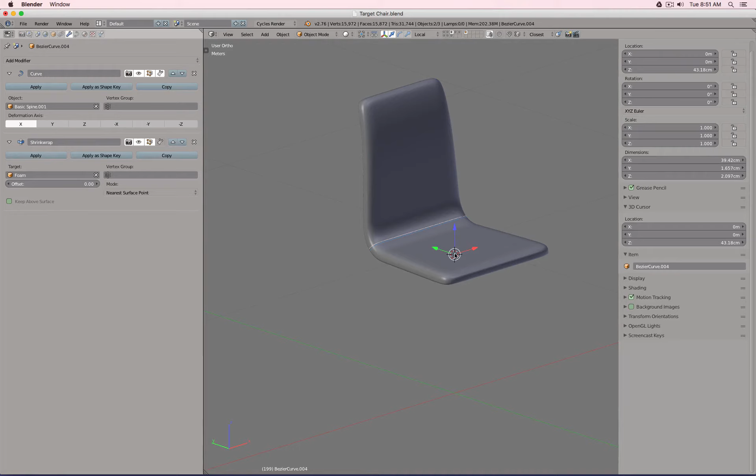The only problem is the following: these objects have their origin there. So that means the stitching object I have to move to the same origin, because the bending, to bend something along something, will work across the pivot point, not where the mesh is. Okay, so...

This is maybe a little bit too small, so 5 millimeters by 1 millimeter by 1 millimeter, so we can see it, not 1 meter. And then I will have to do the same, move this one slightly up. Maybe give this 100, okay.

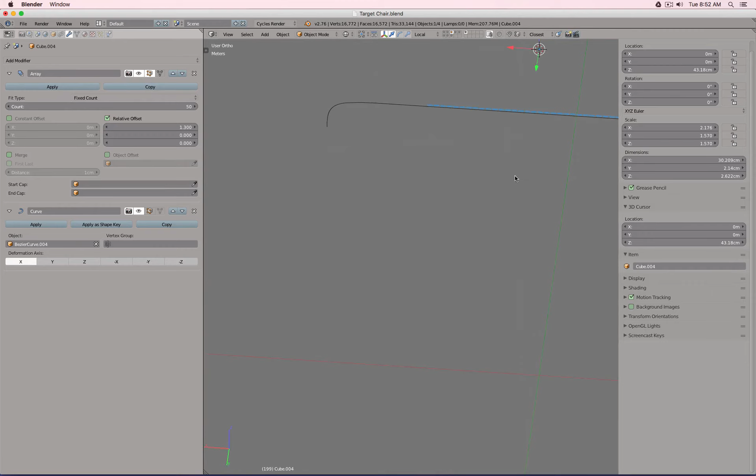And then this one we want to bend along this curve, and we will run into this problem, unfortunately. So up here this is all fine, but there this is not fine. And why is the path and the mesh not lining up?

Well, the thing is, it lines kind of up, but not with the shrink wrap active. We can turn the shrink wrap on with this function here. But then as you can see, the problem is that here it looks okay, but there it's inside the part. So if I make a cut section view, there you can see how the curve is. So this is kind of annoying.

So what we can do - well, this is actually our masterpiece - we make a copy and move it away, and then we can select everything W, W, W, W, and then we just add more points. And there you see now it perfectly fits.

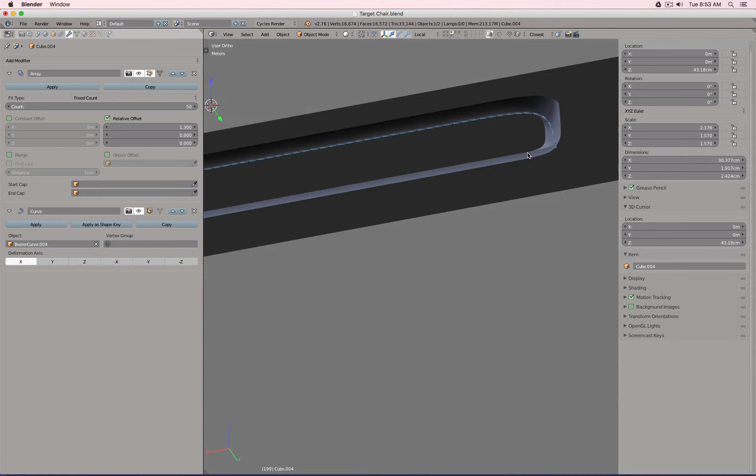And then we only have to go and adjust the tilt. So T, A, Control T, tilt, different direction, no. There we can add a subdivision to this mesh.

Okay, and in case the stitches are too high, we can move this object straight up along the z-axis. Yeah, because that actually creates an offset, as you can see. If I move it along x or y, you see an offset left and right. X is actually, because I bent along x, it's moving along the spline, and G and Z is an offset along the path up and down, and then this way I can slightly sink it in maybe a little bit more.

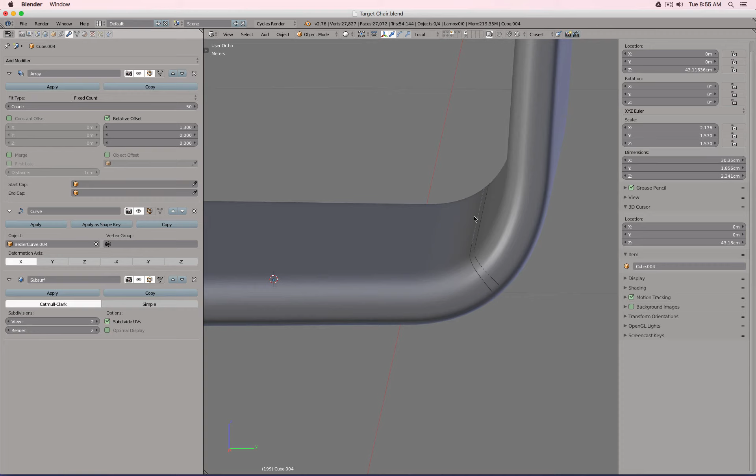Okay, perfect. So that's the alternative way how to create that cross-section path, by simply creating a path yourself. And then later we have to add manually more points. Maybe this is a better way actually, because you're a little bit more in control. It has a tick more work than simply copying out a cross section, but we can also get very nice and good and clean results.

The thing I like about this approach is simply, again, we work with a very basically oriented cross section. So in case I would have to make a screenshot of the cross section for dimensioning, I simply turn the bend command and everything off, and I see the original path I have.

However, we can sculpt this very small, tiny seam in here. So instead of building this geometry, we actually use the sculpt tool and press geometry in. And for example, even those bumps we have here, we could do either with the displacement modifier, or if we only need it at certain locations, we can do it with the sculpt mode. The sculpt mode is also very good for fabric when we have to build wrinkles.

So here is actually now my main object. I will Shift D, make a copy, and put it to layer 5. I go to side view, and I will introduce you to the sculpt mode. But before we do this, we have to say bye-bye to the subdivision modifier and apply the mirror modifier.

Then we are back to this really basic block, and instead of the subdivision, we will use the multi-res. We can subdivide it, and you see this actually works similar to the subdivision surface modifier. So we have for preview and for render, and we have here in addition something for sculpt.

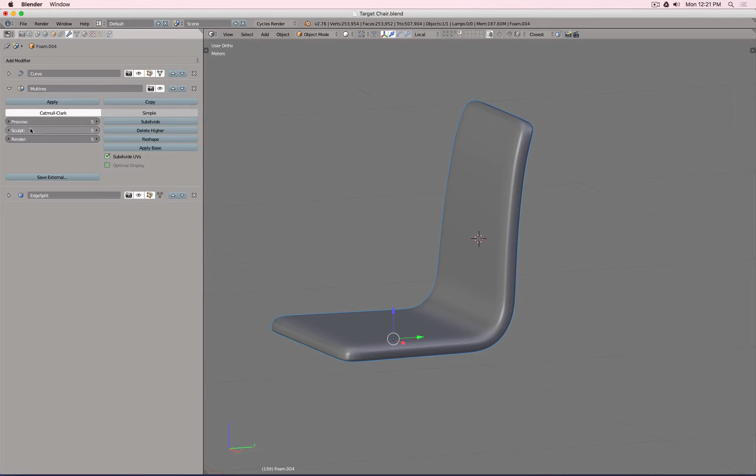The way this basically works, I will show you in a second. We can kind of paint over our objects with a brush and then push and pull geometry. Based on how fine this mesh is, we can sculpt finer or coarser details. So with these steps, we can sculpt something that looks very coarse, more proportional design. And when we go to sculpt level 4, we can sculpt finer details.

But before we continue, there's one thing we have to adjust. Because now I have no subdivision before my curve modifier, I have to really by hand add extra geometry. I simply do this with Control R and add at certain strategic locations some extra loop cuts so that it is nice and round. And there you see we're very close to the original design. Again, we're doing foam and upholstered stuff here, so a little bit of deviation is more than okay.

Great. So now how does the sculpt mode actually work? I will show myself this.

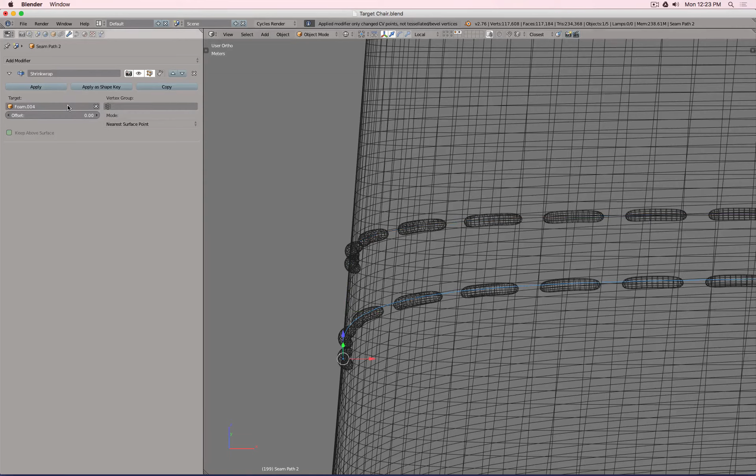The stitching, and I see the stitching is actually off because it's using the wrong object now. So what I will do first is go to this one, and go to this one there, and then I will apply this shrink wrap there, because then with the spline adjusted you will see the stitching adjusted.

Okay, so now I have a rough idea where I would like to put my seam in, and let me show you now how that sculpt mode works. It's pretty simple. We select our multi-res object, go into sculpt.

Let's open the toolbar. We have brushes. We can add clay strips, crease, fill/deepen, flatten, grab, deflate or inflate, smooth, sculpt, scrape, pinch/magnify, mask, layer stuff, etc.

And I will work with the smooth command. You will see here we have a radius and strength. This can also be used with a graphic tablet, so based on your pressure you adjust this value. In the 3D view, if you press F, you see we can adjust the radius, and with Shift F we can adjust the strength.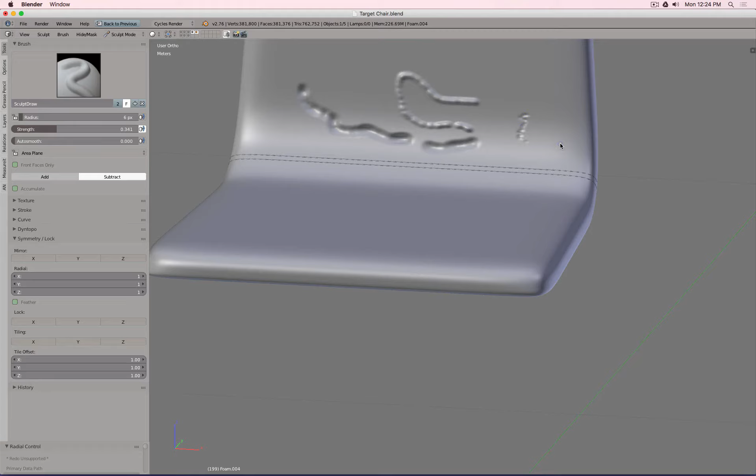So if I now left click and drag, you will see that it adds geometry to it. But it's not really extruding, it's pushing and pulling. If I go with subtract, I can push it in. And if I make this tinier, see it's smaller details. If I zoom in, it's even tinier detail, but now the mesh is not fine enough at that zoom level to do it.

But if I zoom out, you see the detail gets bigger. So the size is actually more relative to your object, how far you zoomed in or out. That is rule number 1 you have to keep in mind. Then we have add and subtract.

Oh, there's a symmetry option, for example, we can use. There are some curve options, and what we will use here for stroke is the line command.

Because fortunately this is pretty much a nice straight line, let's zoom in and see if we can draw a line kind of where we need it there. So there you see now we sculpted in kind of like the seam.

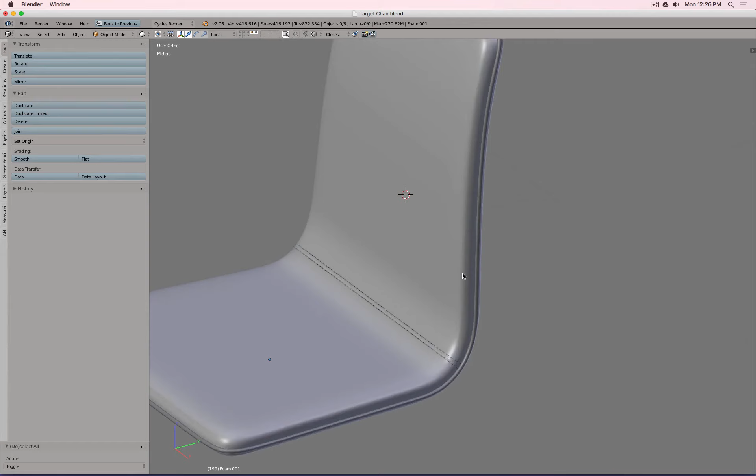I would like this one to be visible, so I put it to layer 4, there and there. Okay, yeah, well, you see already it wasn't too difficult.

We go back and undo it. We could also zoom in. So now we have to increase the brush size, for example, to be able to sculpt these parts.

What you have to be careful of is when we do this multiple times, you want all these strokes to line up nicely. And again, be careful with your zoom, because this now will be a pretty big line, or here. There you can see how big I made this line.

So it takes a little bit of playing around. If you have a steady hand or a graphic tablet, we could also maybe turn this into dots, for example. Zoom in, and this is too much strength, so let's lower this, maybe 10. Okay, in this case here, I think I might need a higher value, I'm already at 5 now. Okay, I will just keep it this way.

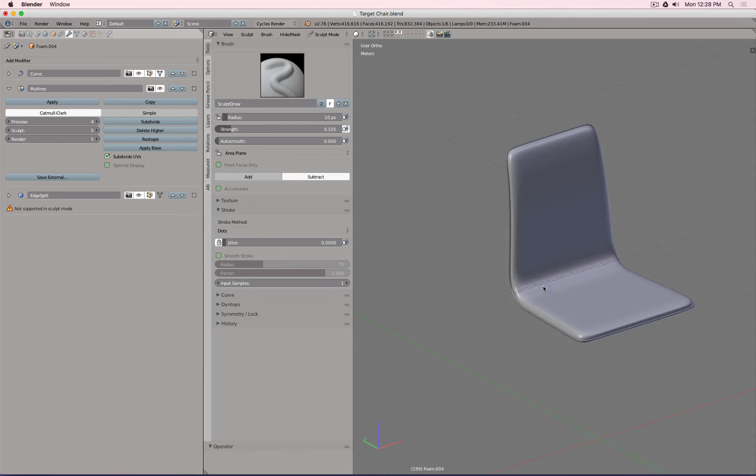I can brush this a little bit by hand, going over it and over it, but with a mouse it's kind of tricky, so not really ideal. Let's see if maybe we can improve this area.

What I will do is artificially add more loop cuts there, so that my sculpt command will give me more vertices to play with. At least that's my hope. And yeah, you can see now that this area got a little bit denser. There's a finer mesh now.

So now you see I can do a crisper line. Okay, with this there, oh, it does reshape. No, I will actually delete the subdivision—this one can go—and then go back to the multi-res afterwards. Control 5, so I switch to a level 5 subdivision for my multi-res. Then let's go back to the line.

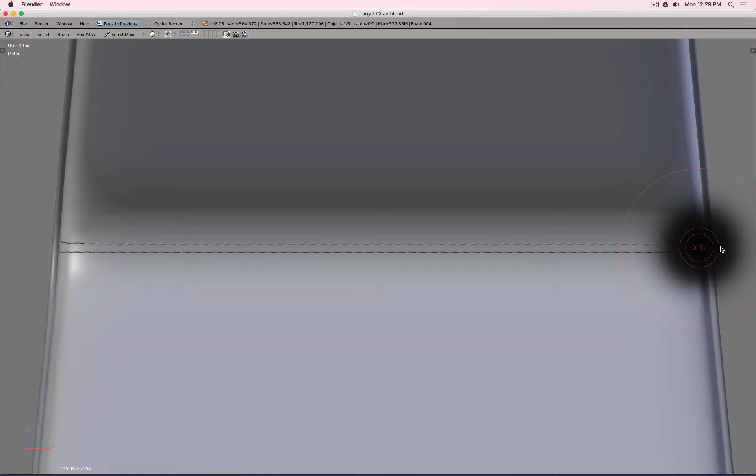Okay, shift spacebar for full screen. Let's go to a nice view and try to find the correct angle. This is maybe a little bit too high. Ooh, way too strong, so maybe this—I'll make a quick test. Yeah, maybe a little bit smaller, a little bit stronger. Yeah, see, that actually feels a little bit better.

So now let's make this line there. Okay, so here this fades out a little bit. We can get away with it because maybe I will cover there. I could go ahead now, and in this case, because this is a really tiny part to adjust by hand...

I will switch back to dots and adjust my stroke. Whoa, too big, a little bit smaller. Yeah, this is correct. Softer. Yeah, maybe there. Same, then maybe here. There, okay nice. Yeah, now we can leave it this way.

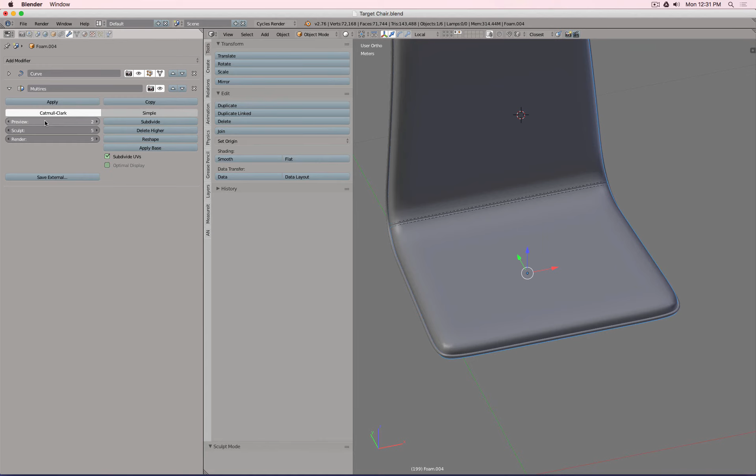Now we go into object mode. You will see, well, where is it? It's gone—no, it's not, it's just hidden. So we can show different previews, and with each preview we get a bigger or smaller representation of the detail. So we soften it afterwards a little bit. Question is, do we really need this high res, level 5, or is maybe 4 or 3 still sufficient? And then for rendering we could also just render it with 4.

Okay, so that's a little bit about how to do the sculpting, and you see it works pretty fast. The line is still kind of too big, but this is okay. Could fine tune this a little bit more, or again, based on how far you see an object, you might have to make the detail a little bit bigger so it pops better.

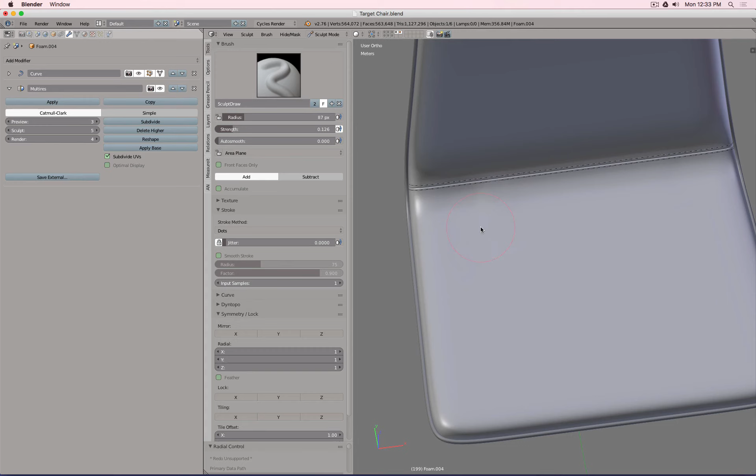And I mentioned there are some details here, kind of like these bumps. So how could we do something like this? Same idea—we go back to sculpt mode and make this pretty big. This has to be really soft now. Then, is symmetry turned on? Yes, symmetry is turned on. That's not what I want. So there, zip, zip, and maybe add a little bit smaller.

So you see, we could actually play crazy around, just do some interesting patterns here, and then, for example, go with the smooth command and fade those out—a pretty strong smooth command. So if there was too much detail, we can remove it. Think about this tool like digital clay.

We could also maybe go into level 2, so it's a rather coarse object, and then inflate and deflate. So here, see, I just add some randomness to the side and the structure. The value is right now a little bit too big—I just did it so you can easier see it. So instead of using a displacement modifier, because we already work with the multi-res, we can simply sculpt it, and then we're in more control.

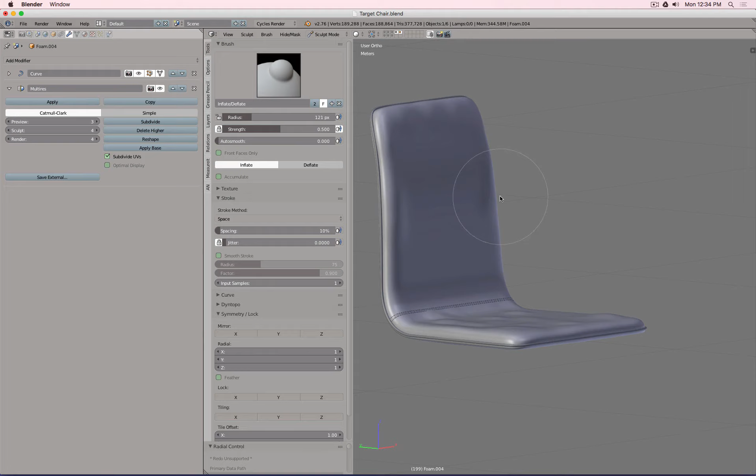Okay, that's basically how you can use the sculpt mode. So here's a simple trick for how we can design the sides nicely and symmetrically.

Yes, so this is a different approach. I will turn on the symmetry, and then I would have to play around a little bit with this value, try to see what looks good. Okay, let's zoom out—yeah, this is maybe a tick too deep. So maybe a tick smaller, Shift F, maybe less strong, and from there to the center, let's zoom out. Yeah, this maybe looks good.

And because we have the symmetry turned on, the other side is done. Now I can turn this off, go into top view, zoom in decently, and all I have to do now is figure out the correct size. So for example, to there, and then the strength, and then maybe find a good position where these three strokes could overlap.

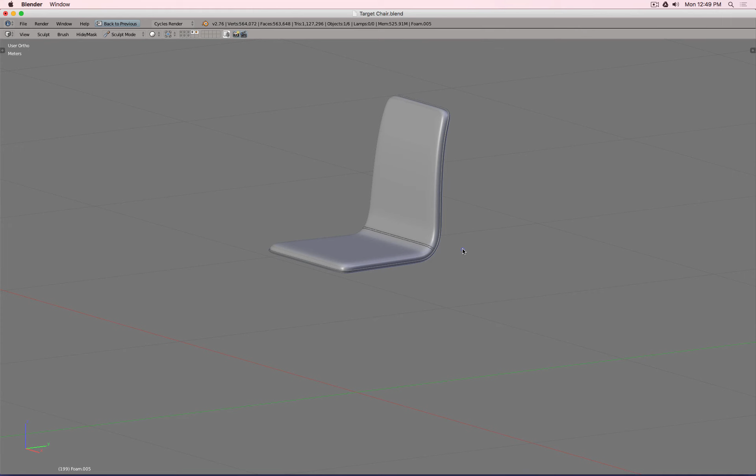Okay, that was a small workaround or trick for how to do symmetrical parts with this symmetry. So the last pieces that might be good to put in are those plastic brackets. Let's go to view from below.

So how do I line this one up? I can go to here, Shift S cursor to selected, and then create a cube and scale this cube down. Okay, so how much is this rotated? There, that amount. Let's do the same there.

So then I can move this one down, or actually up. And you see now, because I started from the origin of the pipe, I can simply slide it along.

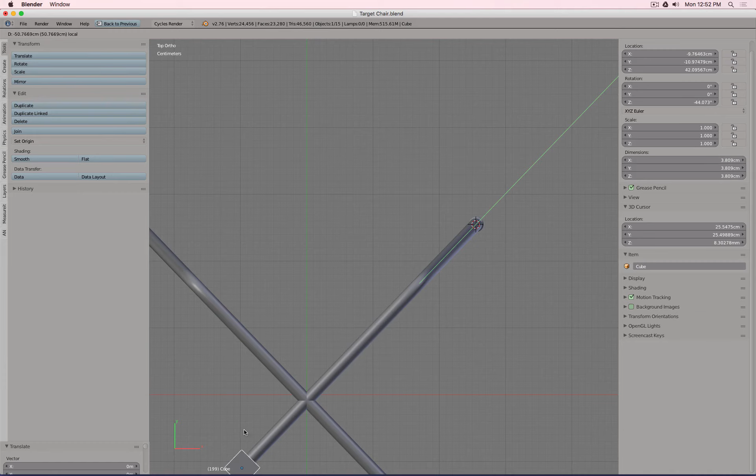So we can now start sculpting these parts. The wood surface might help in this case to be visible there. So a little bit lower, maybe like this. Okay, yeah, this is good.

And maybe let's go up a little bit there, and we can move this one in a little bit more. This is currently Y - let's say this is 3 centimeters. Yeah, size wise that looks similar.

So we have to add those rings to it. For the moment, it's easier to undo the rotation, then Shift S cursor to selected. Let's add a circle - because this is going to be a very basic dummy model, I simply put in a polygon circle, which isn't very precise, but more or less does what I need.

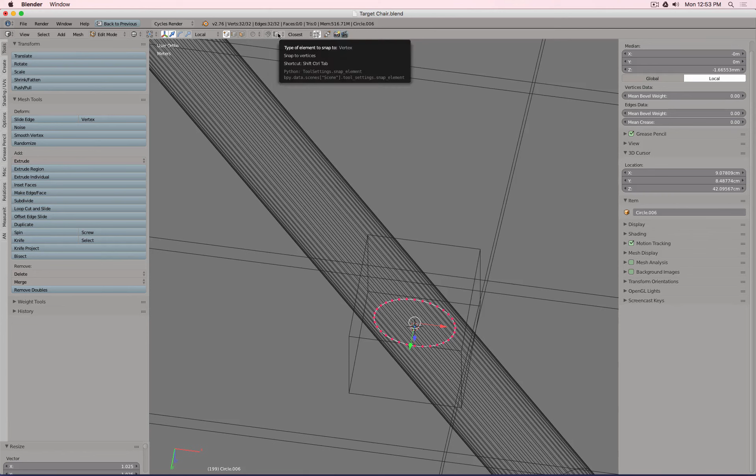Let's make this a tick bigger. Okay, good. So then, with my vertex snapping, I can snap it to this point. Shift D, Y, vertex snap to this point. And then these two rings I will join to the cube.

And then I will select those two cube faces, delete, and then make a loop cut and a loop cut. You'll see why I do these loop cuts, because then I will say U, U, F, U, U, F, same there - whoops, careful with moving stuff - F, F. And then I can select all these points and fill this complete half.

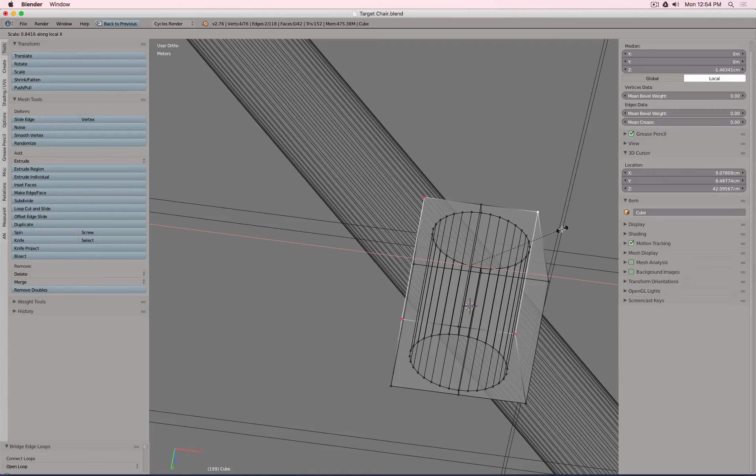There, perfect. We can actually bridge this, so we loft it there. And maybe we can pinch this a little bit there.

Okay, and then what was that rotation? I think I copied it there. Perfect. So now we have this element back, and then we can position it.

So there's number one. Alt D, let's make a copy. So this has to be minus, and then this has to be positive. Now we rotated it, Alt D, and let's move this one maybe to there. And then Alt D, and then here we simply swap out the values in terms of positive and negative, and there.

So there we have, for example, the basic representations for those plastic elements we can use to secure the pipe through. In case this is too big, we can still select it and then in edit mode S, Y, Y, scale it down there. And then all these parts are updated all at once.

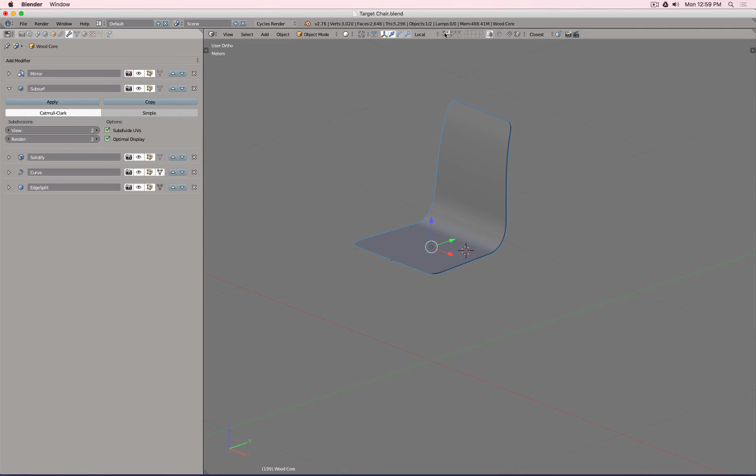So you see, this is actually a quite interesting approach because we mix precision modeling - for example, the pipe diameter, etc., and the wood board - with digital clay sculpting, because essentially the pipe and wood part I can easily do in any CAD application. I might not as easily be able to adjust the thickness and bend it as easily as I can do here right now, but I can get pretty close.

But where something like Alias or Rhino will be very inefficient is doing this with soft goods. I can obviously build this part in Alias, but it will take more time, and if I have to do a quick design change, I would kind of have to start from scratch. So the Alias, Rhino, Fusion approach is more or less only good when you've figured out the design, but for the quick ideation phase, it's not really ideal with a product like this.

And I used this process in multiple projects to start the conceptual phase, and then in Rhino and SolidWorks we fleshed out the final CAD models so it could go into production, and it worked out pretty well.